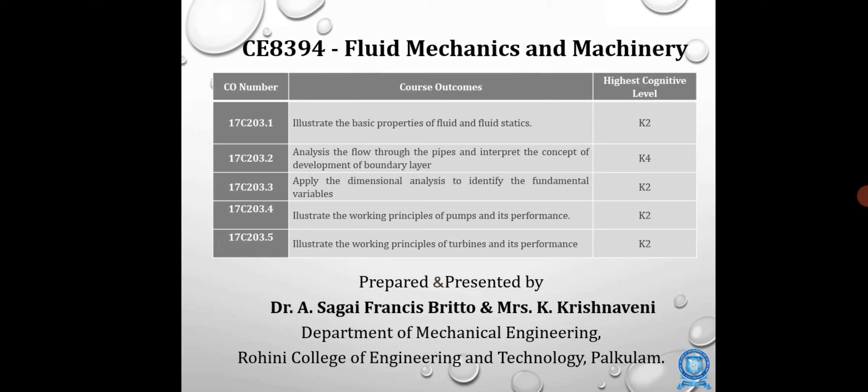So today we'll be seeing some rules regarding pressure, the Pascal's law, and some problems involving Pascal's law. So this is actually the syllabus for unit 1. We'll have vapor pressure, capillarity, and also surface tension. Everything we have discussed in the previous videos, and we have already learned absolute pressure and gauge pressures. So now we are going to learn the Pascal's law and some application problems.

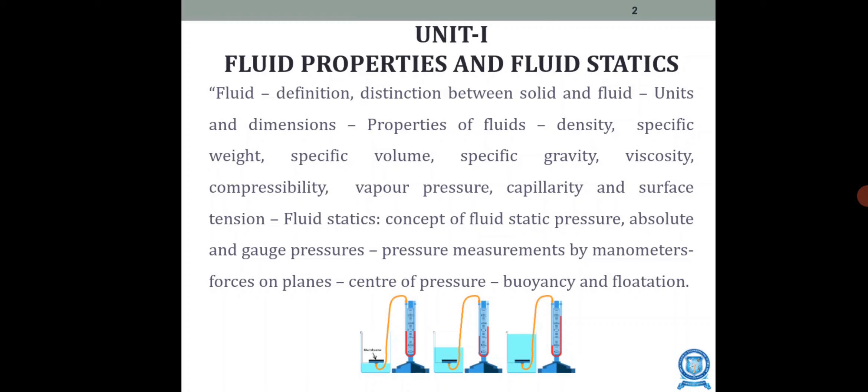So what is actually Pascal's law? Pascal's law states that the intensity of pressure at a point in a static fluid will be equal in all the directions. So whether it is the x direction, y direction or z direction, the intensity of pressure will be the same in all the directions, in the sense we can say Px is equal to Py is equal to Pz. So consider an arbitrary fluid element which is wedge shaped.

The width of the element can be unity, and we have three pressures Px, Py, Pz in the directions. Angle ABC is theta. The forces acting on the element are, number one, pressure forces which are normal to the surfaces, and also the weight of the element in the vertical direction.

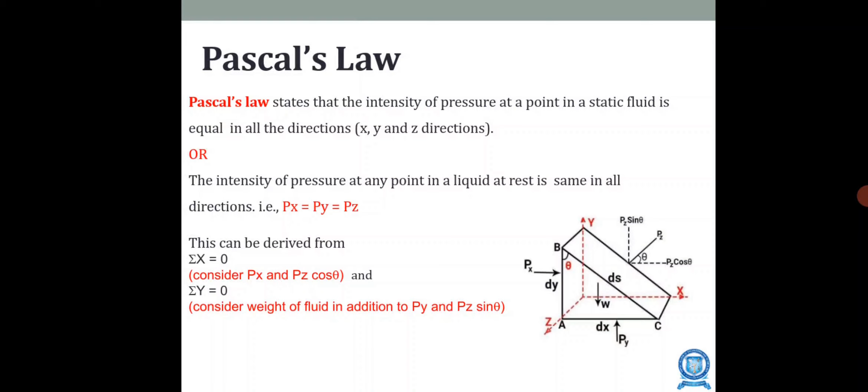For equilibrium, all the forces should be equal to 0, right? So first we have sigma x is equal to 0. The forces Px and Pz cos theta will be equal to 0. And when you consider sigma y is equal to 0, we consider the weight of the fluid in addition to Py and also Pz sin theta. So this gives us Pascal's law.

A very good example of Pascal's law: you take a rubber ball, fill it with liquid, and with the help of a pen make many holes, and apply pressure. What will happen? The water will come out from all the holes with equal pressure. That is, the pressure applied at one point of the liquid will be transmitted equally in all the directions.

Another example: you can take one as a ram and one as a plunger. One is of this diameter and another is of greater diameter, and the original force is F1 and F2 will be ten times F1. The pressure P1 exerted in this area and the pressure P2 exerted in that area will be the same. That is, by Pascal's principle, P1 is equal to P2. So the pressure intensity will be the same irrespective of the diameters of the ram.

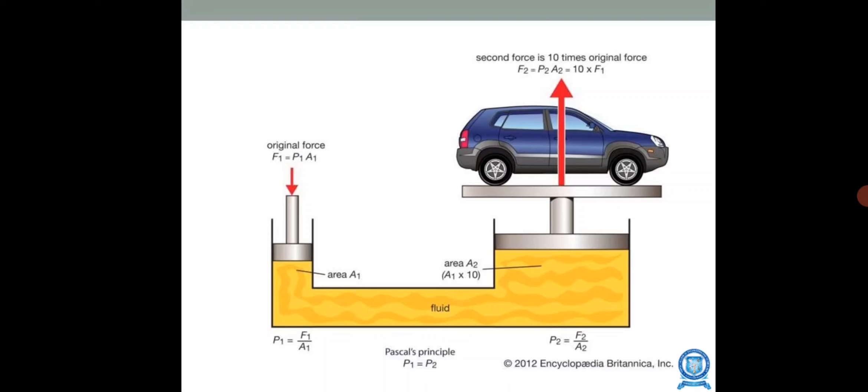So next we are going to solve a simple problem using Pascal's law. A hydraulic press has a ram of 30 cm diameter and a plunger of 4.5 cm diameter. Find the weight lifted by the hydraulic press when the force applied by the plunger is 500 Newton. First of all, we have to make clear what details are available and what we have to find.

The diameter of the ram is 30 centimeter, taken as 0.3 meter. The diameter of the plunger is 4.5 centimeter, which is 0.045 meter. The force on the plunger is 500 Newton, and next we find the area of the ram and the area of the plunger. Now the pressure intensity due to the plunger will be force on plunger, that is 500, divided by area of plunger, 0.00159.

By Pascal's law, the intensity of pressure will be equally transmitted in all the directions. So the pressure intensity in the ram will be 314465.4 Newton per meter square. In Newton we are getting a large value, isn't it? So the pressure intensity of the ram will be equal to this; the pressure value is the same.

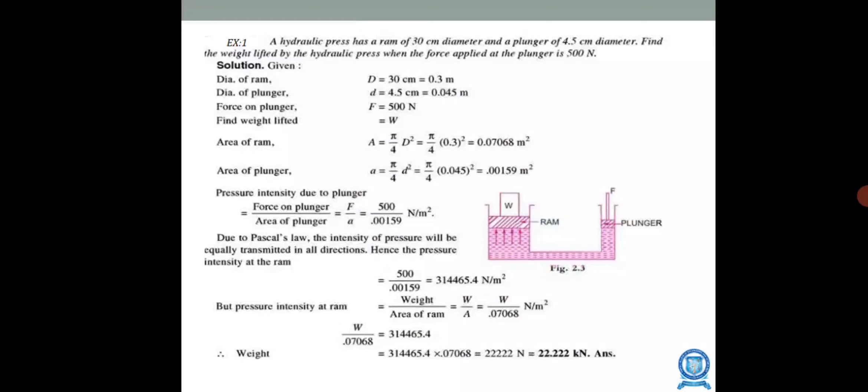The weight is unknown, so by using the formula we find the value of the weight. This also comes out as a large value, so we convert it into kilonewton. We get 22.2 kilonewton. That is the answer.

So next I am having a next problem. We are having a hydraulic press of 20 centimeter ram diameter and a plunger of 3 centimeter diameter. It is used for lifting a weight of 30 kilonewton. Find the force required on the plunger.

Okay, so again I am having the diameter of the ram; it is actually a similar problem to the previous one. For clear understanding, I had another problem. So the diameter of the ram will be 0.2 meter. So I am finding out the area, and the diameter of the plunger and the area of the plunger. The weight that is being lifted is 30 kilonewton. Okay, so now what happens again?

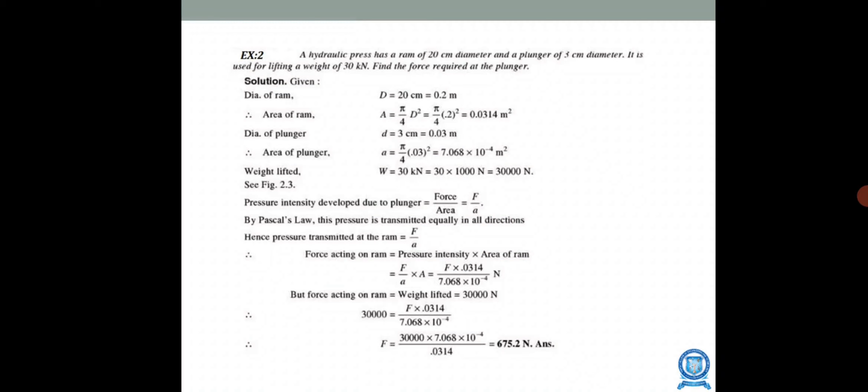The pressure intensity on the plunger is force by area, and the force acting on the ram will be equal to the pressure intensity into the area of the ram. So we have to find out the force when the weight lifted is 30 kilonewton. By using the formula, we have found that the force is equal to 675.2 Newton. This is another problem which had applications of Pascal's law.

Next, this problem I have done regarding specific gravity, so that concept also will be included. I am having an oil of specific gravity 0.9, and it is contained in a vessel. At a point, the height of oil is 40 meter; we have to find the corresponding height of water at that point. So how are we doing it?

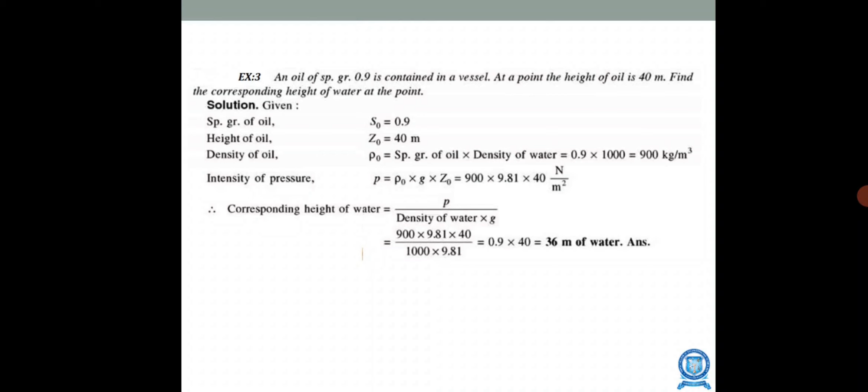We know very well the intensity of pressure is equal to density into g into height. So we take rho as 900, the density of oil, into 9.81 into height. The corresponding height of water is equal to P, the intensity of pressure, divided by density of water into acceleration due to gravity. So we replace it, divided by 1000, the density of water, multiplied by 9.81, and we get 36 meter of water.

So the next problem: I am having an open tank containing water up to a depth of 2 meter, and above it is an oil of specific gravity 0.9 with a depth of 1 meter. Find the pressure intensity at the interface and also at the bottom.

So at the interface, Z1 is 2 meter, and the height of oil is 1 meter, isn't it? Above that, the specific gravity of oil is 0.9, the density of water is 1000, and the density of oil is 900. These densities you should know already.

So at the interface, at point A, what happens? Pressure P is equal to density into g into Z. At point A, this height will be 1, isn't it? So we get the value as 0.8829 Newton per centimeter square. At point B, what will be the Z value? It will be 2.

So at the bottom, at point B, what happens? We have 900 for the oil, into 9.81, into 1, where 1 is the height of oil, plus 1000, the density of water, into 9.81 into 2, the height of water. So we get 2.8449 Newton per centimeter square.

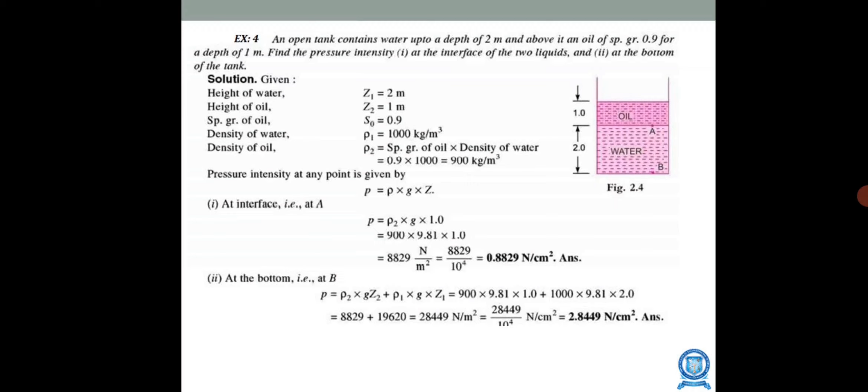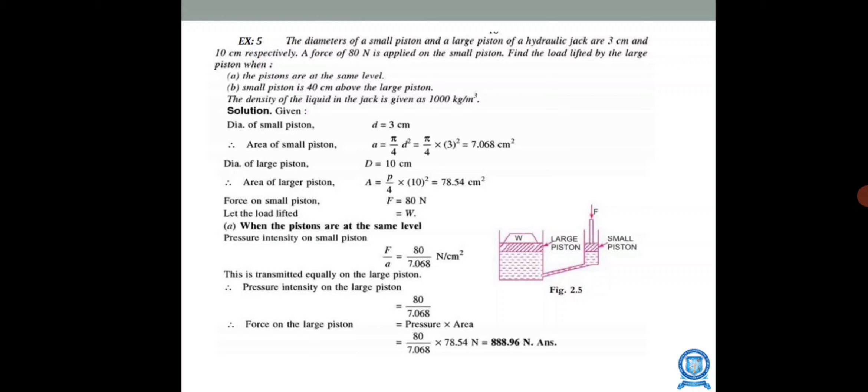Therefore the force on the large piston will be calculated with 78.54, that is the area of the large piston. So pressure into area: that pressure is 80 divided by 7.068, multiplied by 78.54, and we get 888.96 Newton.

Next one. The previous calculation was when they were at the same level. Now we consider the small piston is 40 centimeter above the large piston. So the pressure intensity of the small piston is equal to 80 divided by 7.068. Now consider the pressure intensity at section AA. At section AA, it will be F by A plus the pressure intensity due to the height of 40 centimeter of liquid.

So pressure intensity due to 40 centimeter is rho into g into h: 1000 into 9.81 into 40, and since we are working in centimeters, I have divided by 10 power 4. I get the value as 0.3924 Newton per centimeter square. When you take it for section AA, you will have to add that pressure also. So I add that pressure.

That is 80 divided by 7.068, plus the pressure intensity due to 40 centimeters. That we get as 11.71 Newton per centimeter square. So the pressure intensity transmitted on the large piston will be 11.71 Newton per centimeter square. The force on the large piston is equal to pressure into area of large piston, so we get 919.7 Newton.